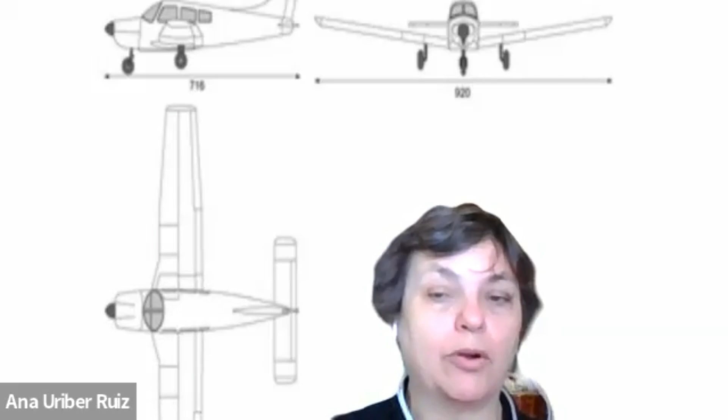And where in California are you? I'm in San Francisco. San Francisco is an unusual place to learn to fly because this airspace is extremely busy - you have San Francisco on one side, Oakland, San Jose, and then a bunch of little airports around. So the communication is fast. What you learn here, you can apply it anywhere outside. It's really good as a pilot who's learning to fly - this is the busiest space. I started learning in Los Angeles, so I can relate.

Yes, we're no longer in Los Angeles. We're in Florida now because we live on this sailboat. It's amazingly similar to flying, except instead of the cruise speed being 120 knots, it's 5 or 6. That's not the scary part - you can't outrun weather. That's the only problem.

So how old were you when you finally decided, I'm going to start flying, and how did you approach that? At the end of my 40s. I have a great teacher at home, so he was always supportive of the craziness of me flying. And then I walked into the flying club one day, and the majority are men - just men. I decided to look into something related with women.

By an unusual chance, I found Women of Aviation, because you have two institutions in the US. One is Women in Aviation International - that's a huge thing, besides the 99s - and then Women of Aviation Worldwide. I met the mind behind the idea, Mireille Goyer. She's a Canadian who does these things a little bit different.

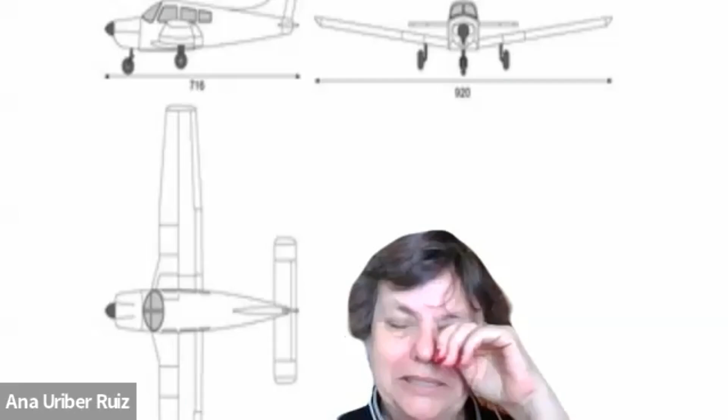Was there something in particular that made it click for you on how to land in those situations? Yeah, it's a challenge. Different planes have a different view. I started learning in a Cessna, which is very practical because you have two doors, you can come in and out. But I felt too low and was not able to see outside, so that wasn't really something I wanted. I do think personally a low wing plane is a little more stable, so I feel more stable in the air and can see outside and what's happening up there.

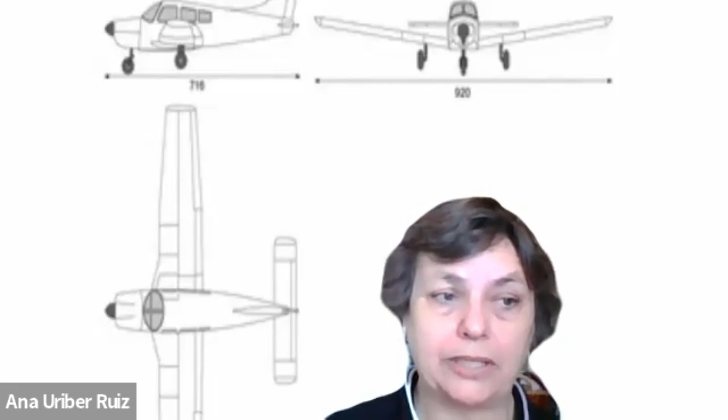That's one of the things that when you read an accident report and the reason why it happens, it's sad - sometimes it's the pilot thinking 'I have to get there,' but having to get there doesn't necessarily mean it's the right thing to do. The weather changes, it's too windy, you cannot see the airport well. You need to have those options unless it's safe for you and the people with you, and you need to park your plane when you have to. So when it's too windy, why fly? You'll be uncomfortable, it's going to be difficult - then no, stay home.

When did buying an airplane of your own come into the picture, and how has the experience of buying the plane and of airplane ownership been for you?

Two pilots at home renting two planes makes it extremely expensive. So aviation, no matter how you want to see it, is an expensive venture - it's not cheap. You have schools that will charge you $85,000 to become a private pilot. I always tell the young generation starting out: look at your numbers and make a plan, because no matter how you want to see it, it takes money. You can become a pilot with $12,000 or with $25,000. You don't know how long it's going to take you, it's in your own time. You have a minimum, but the maximum can go all over.

For some people it comes more naturally than others. For bilinguals like us, the communication is really fast - you need to learn to communicate quickly and answer when someone calls you. I think that's one of the reasons it gets difficult for many people. It's not the flying, it's figuring out what to fly while people are talking to you on the radio at the same time. Those little things are the most difficult combination.

So we sat down, my husband and I, and realized that the best way for the two of us to be flying is to get one plane. It's cheaper for us, cheaper to have the adventure we want to have. And then we'll see if my son wants to join in.

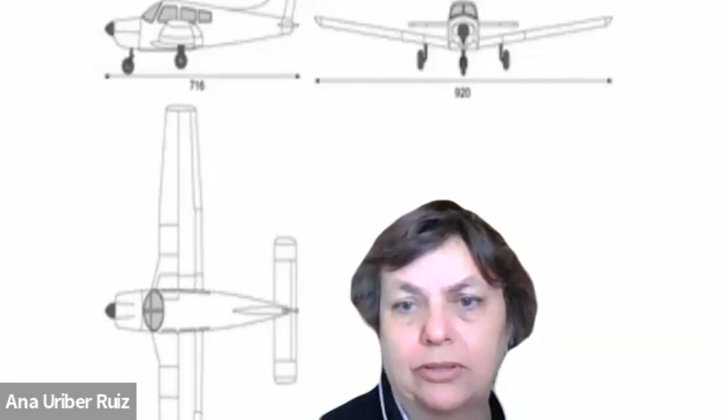But you need to know what type of plane you're looking for. Make sure you have the correct mechanic to check the plane, check the logs, make sure that everything is up to date because it's really expensive. You want to make sure you're getting something you can afford to maintain. One difference between a boat and an airplane is that the regulations are a lot stricter when it comes to aviation, and I think for obvious reasons.

What made you choose the Piper Archer, your specific airplane? Low wings—you like the low wings. I feel very comfortable in a low wing plane. Stable, you're very stable, super stable.

I've flown both. I personally find the Cessna easier to land, maybe because I have a lot more hours on it. I've flown a Grumman trainer, a Piper Cherokee, a Piper Archer, a Mooney, but mostly 172s, 152s, 150s. I find the Pipers more nose heavy, but it might just be that I have so many more hours in a 172 than in the others.

So when you land a 172, the nose gets a little heavy because you go a little slower than the Piper. In the Piper, you can go in at 75 knots, but when you turn final, they come down and down. In a Cessna, when you come around, it's like 65. For me, 65 feels uncomfortable—I feel the nose is really heavy. But it's just one of those things, as you say, it's the way you feel comfortable.

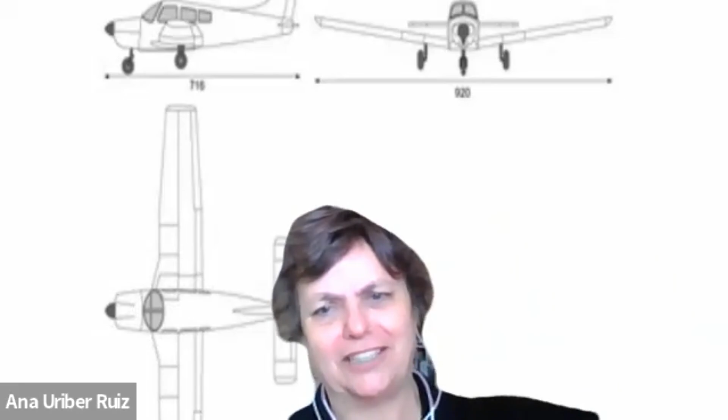They route you out. You need to go to 9,000 feet, then go down here, then down here. It takes hours if you do that—instead of 2 hours, they give you almost 3, because they turn you around. So you learn how they manage the airspace, and you follow up and do things a little different.

It's different every place you fly. The rules stay the same, but it's a busy airspace. Same thing if I try to go into Chicago—who's going to go near O'Hare? You're around O'Hare, it's the same thing: they put you on the side and you stay there because it's not your airspace. It's too heavy, too fast, too quick, too many planes, too many runways—I think O'Hare has 8, or 6 or 7 runways.

It's great if you're not comfortable to get an instructor and start expanding your comfort level with new things, but you want to challenge yourself just the right amount so that you're growing, but not in over your head. Exactly.

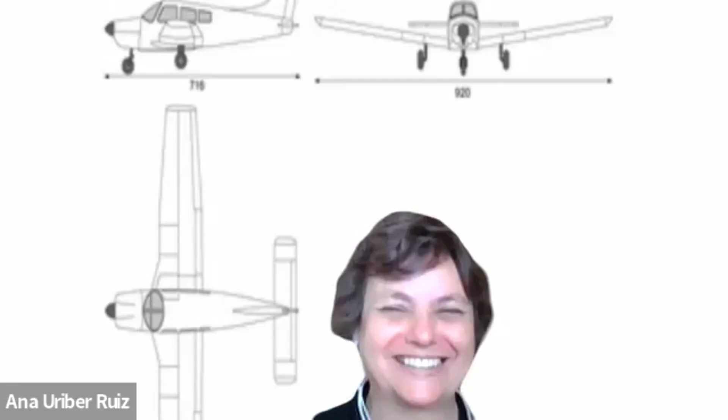Because there's still a risk when you're flying. Just like when you're driving or when you're boating, you want to be aware of the risks and manage them properly. Who was your flight instructor?

Oh, an Argentine. He is amazing. I think one of the things I always tell young women when they start is fly with a couple of CFIs. You need to understand the way they teach, it's good for you to understand what they are teaching you. If their style of teaching is not something you like, you can change. It's okay to change.

But I was very impressed because he taught my husband. He's now on the airlines, but he has always been a teacher. He knows how to pass along that information on the spot, meaning you're applying, he says, remember this that you read? This is what you're going to be doing. So match the practice with whatever was on writing. It was really, really good.

I always talk about how important the chemistry with the instructor is, and the impact it has on how long your flight training ends up taking and how much it ends up costing you has a lot to do with the level of comfort and chemistry you have with your instructor. You have to have it. It doesn't work that you can be there for years. It has happened. I have a friend who did have that happen to her. It took almost 3 years in between instructors, but she finally found the right one and got her license.

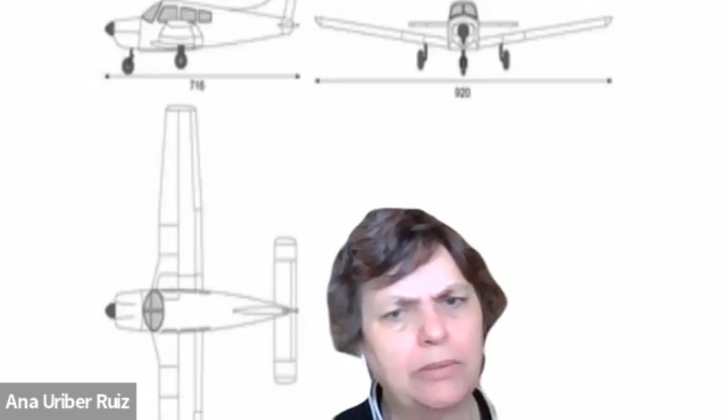So we just tried to go back, and the next weekend we went to Pennsylvania someplace and had lunch there. It was beautiful. When it's too hot, that makes no sense, plus the density altitude and the impact it has on the performance of the airplane, of course. Yes, a lot of people don't realize how much of an impact the humidity and the heat have on the performance of the airplane, as well as the elevation, of course.

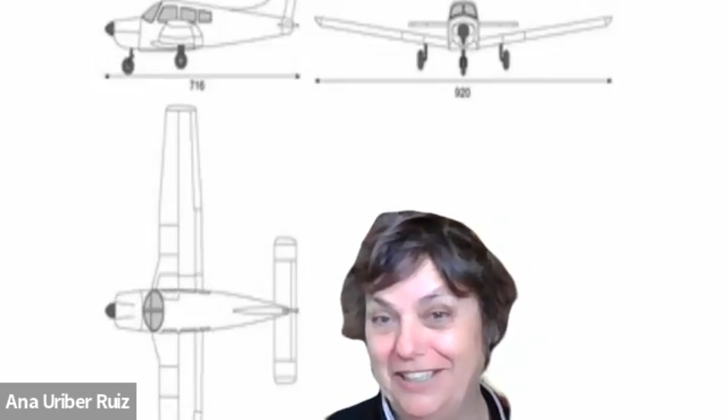That's what happens here all the time. So you fly to Lake Tahoe at 7 o'clock in the morning, but by the time it's 11:30, 12, even though you're sitting at 7,000 feet, it feels like 11,000, not 7.

Try to get out early when it's hot, but you can't do it when you're in the middle of the mountains. You need to wait until the next morning. There are people who don't realize the importance of waiting and have really gotten themselves into trouble out there. You can't fly through the lake - first it sucks you in, and then if you're on the side of the lake, it lifts you up. You still need to go around and around till you go up, then try to go over the mountain tomorrow. It's definitely important to know when to fly and when to wait.

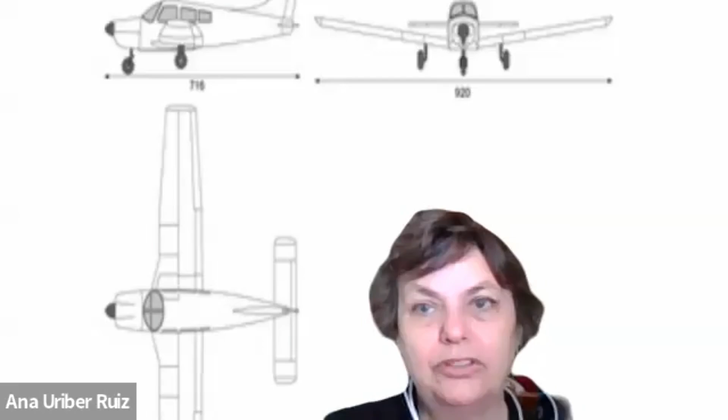That's the good thing about the little airplane. You go in the morning, you check the weather, and you check it not only when you leave, but at what time you expect to come back. If you see the winds are coming and shifting, going up to 35 knots - no, can't do that. I know it's beautiful outside, but you don't know if in 2 hours it's going to be bad. You always check that. It's something we always do.

Nowadays you have the iPad, you have the GPS, and the iPad comes with the weather. You have technology, use it wisely. That doesn't mean it's the only thing you need to check on - you have access to the computer before you leave, and you always have a number in the air that you can call. This is changing, what do I know? You have access, but those things you need to learn along the way and keep handy in case of an emergency.

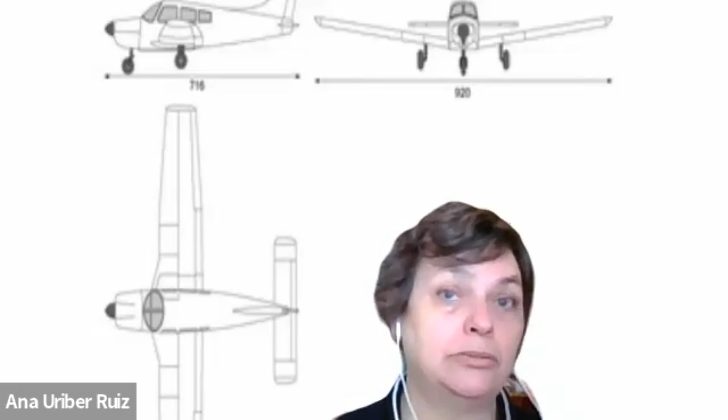That's what I think private pilots need to maintain. It's not the same thing as an airline. It's windy, you just get out. If it's raining, you get out. You don't do that with a little one.

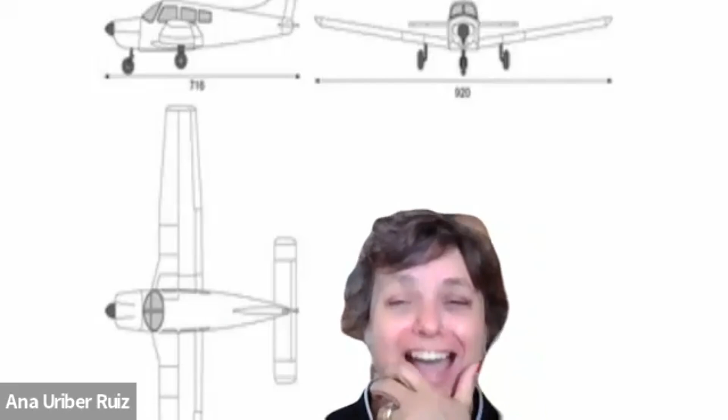What goals do you have for yourself in aviation, or what do you think would be cool to learn next? I know you said you want to work on your instrument rating. I would love to fly with my husband for a week from here to here. The problem is it's not so simple to find somebody who can stay with my son. So our last vacation was 24 hours, because that's about it. We're going to try to plan something maybe in the next 2 years with my sister-in-law, so we'll see. But that would be fun, to go across the big US with my husband. I want to go to Canada and go all the way to Alaska - that's my dream.

Oh, that sounds amazing. It's gonna be during the summer only, right? Because you can't do that unless you're a bush pilot. But that would be fun - sounds like a great thing to put on a bucket list for sure.

One of these days. Do you have GPS in your Piper? Yeah, you have the iPad, you have ForeFlight. It's connected to our GPS, but it's still a secondary help - it's not something you use to fly.

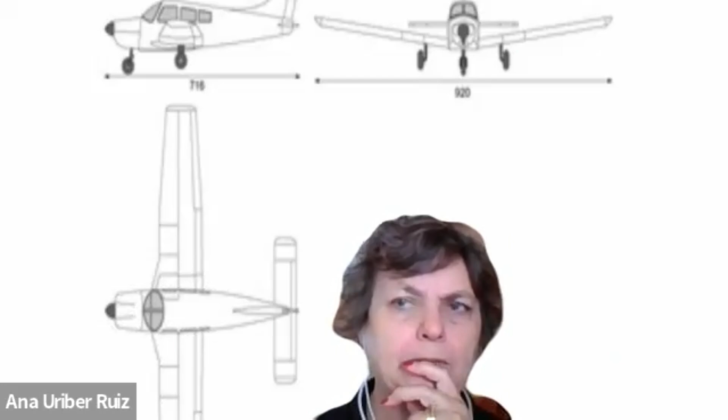That's what I see in this new generation. For me, it's a conversation the CFI needs to have with them - that they need to learn with the instruments they have and add more after they have the private pilot license. That makes things easier to fly, because if you mix them both, one is different from the other. What happens if the iPad dies in the middle of the flight and you don't know how to react with everything you have on? Learn what you have first, then add extra after.

That's cool, because they all try to say, I have ForeFlight. Yeah, but if you don't have an iPad, and the iPad dies, and you don't have a battery in the plane, how do you fly? You're lost in the middle of nowhere. You need to understand where you're sitting when you fly. The old CFIs will always say you fly with a six-pack first. But this new generation is all about having information right in their hands, so they need to learn that the phone, the ForeFlight, everything you have is secondary - it's an aid you can have later. Follow your instruments, look outside - this is key. I agree, redundancy is very important. Have those flights that are long, like a couple of hours.

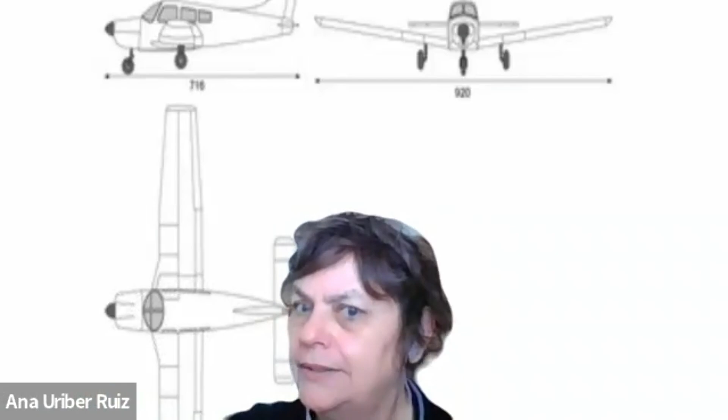For someone who might be interested in getting their private pilot certificate to use in their life and to have that skill, what would be some advice that you would have for them?

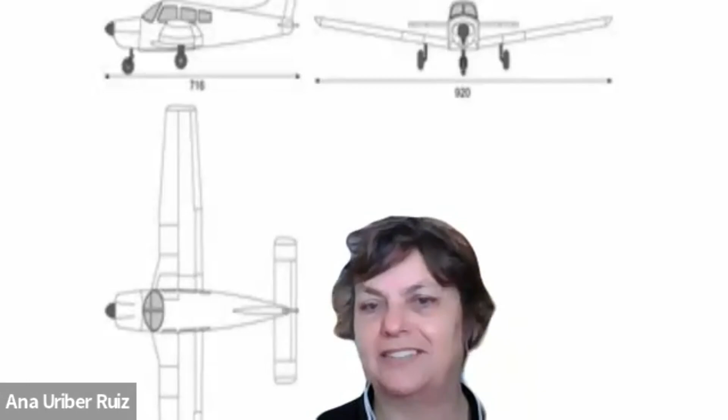Get an introductory flight first. See how you feel flying, right? You're going to be flying with a CFI, an instructor, next to you. But it's about how you feel in a small plane while flying - it's not the same thing as a big one, right? So they need to understand that. And then, yeah, I want to be in the air - and then you realize this is not for me, I feel uncomfortable, I feel unsafe. So don't jump the gun until you have that introductory flight. See how you feel up there. And maybe if you're on the fence, try a second one with someone different in the cockpit.

And then that's it - now sit down and plan. Because part of the issue I see is, I want to start and then don't have the money after. So you've been flying for 25 hours and then you have nothing else.

Latinas in Aviation, the idea was to have a magazine. So the first two magazines that we put out, there was a page in there that I put together that says, where you find people talk about Part 135, Part 61, Part 141 - what is it? So you explain to them what is the difference between one and the other. But the price between one and the other, you're talking about a little car here and a Mercedes there, right? Because that's the difference in the price.

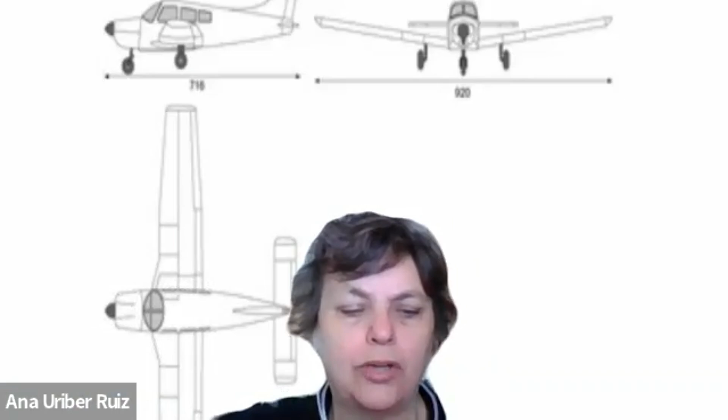You need to see what is good for you - is it okay to go slow at your own pace through a CFI and a small flying club, or do you know you want something cramped, fast, and strong that you're able to follow, right? Because Part 141 has a timeline. Under FAA regulation, you need to go to this place, finish in this place. But remember, the price difference between this one and this one is huge.

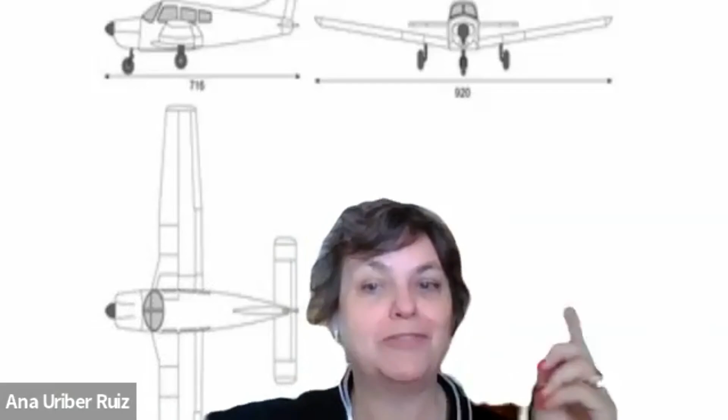So plan ahead. And then they say, I'm accepted into Embry-Riddle, I have a full scholarship for Embry-Riddle. You have a scholarship - the flying plan is not included. So what do you mean? You want to be a pilot with Embry-Riddle? You need to pay out of your pocket, and Embry-Riddle will charge you $85,000 more. Find a place, understand the cost, and see what you can find.

And then you have a lot of scholarships out there - look for them. Be part of the associations - Women in Aviation International, the 99s, the local chapters around, the EAA. You have a lot of associations around, look into them, they always have something. But they have a small scholarship. Yes, but if I have a scholarship for $1,000 here, $300 here, $5,000 here, and $25,000 here, everything adds up - look around, apply for all of them. Why not? The only thing they can tell you is no, thank you.

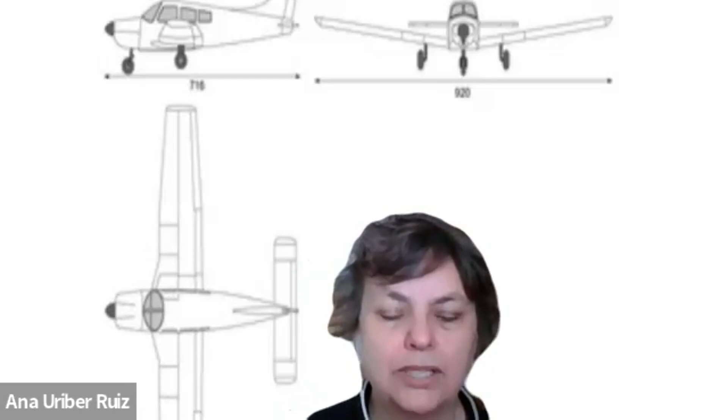So that you learn from that - maybe the presentation in my letter to get the scholarship was not right. So you gotta understand what you're planning. Put it in writing: I want to be a pilot because, from here to here. And that is what they need to see. You don't need to tell them, I come from a little family - no, they don't want to see that. It's what is your end goal and how do you want to get there.

And at the end, you can say, by the way, I was born here and I have cousins, and plan A to B - what do you want, how do you want to get there? That's what they want to see, that's the writing that you need. And women, sometimes they don't want to ask for help, and that's part of the issue.

There's some places and cultural things inside—this is something I need to ask him, whoever that is: dad, mom, brother. Make sure you can do these things by yourself. You're not going to fly with him or her in there. It's you who's flying. That decision is yours, not theirs.

So try to figure out that challenging change in the idea that's part of the culture that says, no, I can't do this. And then you find places where you have a lot of women doing really amazing things, and people don't realize that existed until you start telling them, have you seen this? Have you seen that?

We are very few. They're still battling the field because the number of pilots, at least airline transport pilots, is very low. The difference from 4.1 to 4.3 percent in 4 years is too little. It's very little. But the guard is changing. We need to push them.

I think the change we need has to come from the inside out. The human resources inside Alaska Airlines tomorrow shouldn't be about having a man or a woman, but a person who can embrace something different and elevate you to be more. So when you have that in the HR department, things change—they really change, from the little company to the big company. It's just a matter of having the right fit.

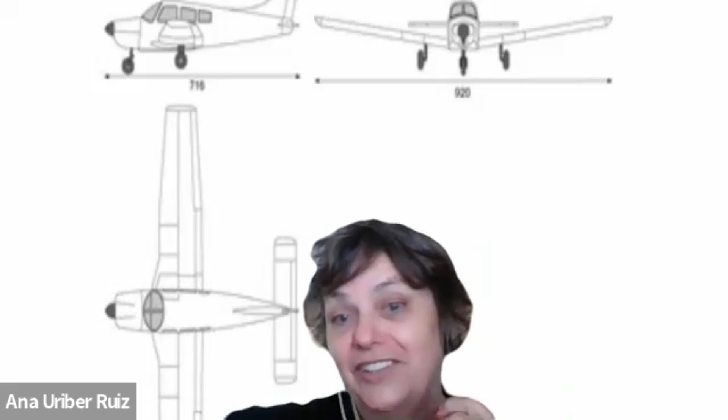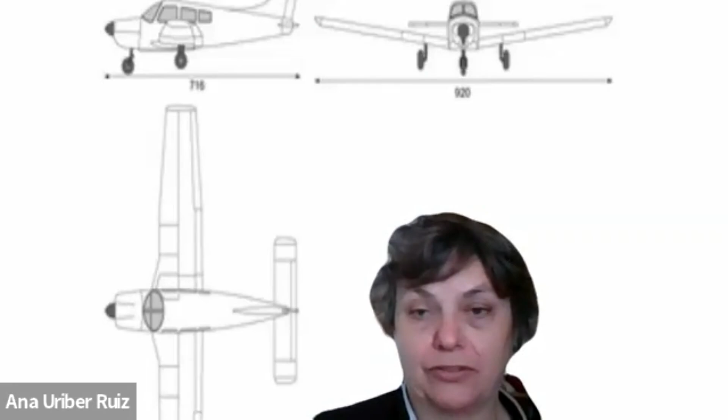It takes time, but you also need to give them the good stories, because there are many. I think it's important to talk about those amazing stories and share them with other women. Because what I've also seen is that a woman who's sitting as a captain at an airline, a captain in United or American or any airline, sometimes gets frustrated with a young woman who's coming in as a first officer.

They need to understand—we have a saying where I come from: the cow needs to remember when it was a calf. Remember the day you were sitting there and the position was the other way around. In this case, you are the captain now. Give them a hand, elevate them, give them what they need, and make them feel strong enough to use their voice.

Help them out tomorrow. Make sure that whatever experience you have, you say, remember, don't take this, don't take that, don't do that, be sharp, be prepared. Those pieces of advice from a woman to another woman sitting in the same place are key.

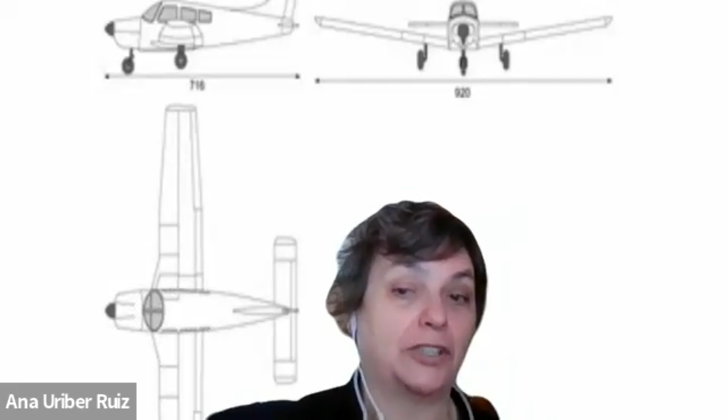But sometimes you have it the other way around—she says, I'm the captain, it took me 6,000 hours to get here, you only have 2,500 and you're sitting here already. So that attitude also needs to change a little bit, right?

So you have men who will give you the right advice, and men who will try to put you down. And you have women who will give you the right advice, and sadly, also women who can put you down. So it works both ways.

So sometimes when they're already up there, have that conversation, because it's really important that they be at ease with you coming in. But when you see that attitude, say, hey, wait, remember when you were here? Let's talk about it, because that's what you need to use your voice for. So if another human being is sitting with you, make sure you do it right.

Was there something about your relationship with yourself that changed when you finally got to see yourself as someone who was capable—like, I did this, I'm learning to fly, I'm actually doing this, I got my certificate? Was there a moment where your relationship with yourself changed through the act of learning to fly?

Nice question. We feel a very strong sense of accomplishment, because you alone are the one who's flying. You don't need somebody else to fly with you. You can pick up that key, get in, and fly. There's a responsibility you have when you become a pilot, the responsibility when you go inside that cockpit and fly.

The responsibility that you were lucky enough to be sitting there, but at the same time, maybe embrace the one who's coming and help them out, because they're going to go through the same thing too—maybe a little different, maybe a little shorter, maybe longer. I think you need to be open minded to the people around you. It changes you because you become more independent. You understand the privilege you're in—it's a privilege to be in the air.

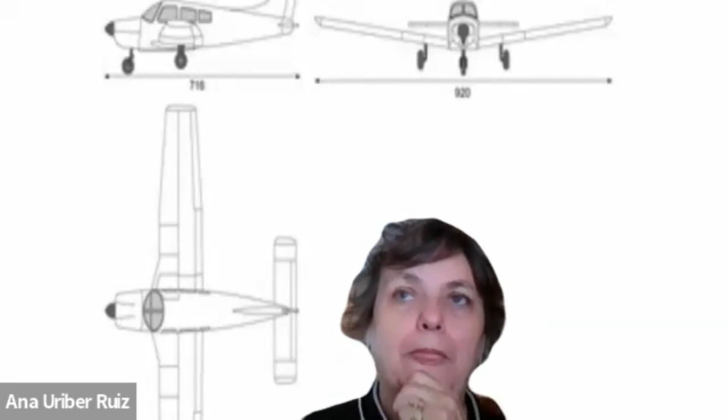It's not like learning to drive a car. It's a huge accomplishment, but it also is a privilege to be there.

When I was a singer and a DJ, I always used to say, nobody's going to die if I hit the wrong note. But I was very aware when I started flying that I lost the right to say that, because people's lives are on the line in the airplane and on the ground. It's a responsibility, it's a big thing, but also to get to know yourself as a person who's capable of taking on that responsibility and making those decisions.

It can be a really special and transformative thing when you realize that you are capable of learning to fly that machine, of making good decisions - aeronautical decision making - and to carry that responsibility with pride and with the appropriate amount of respect for it.

Is there any last advice or thoughts that you would want to leave the listeners of the podcast with today?

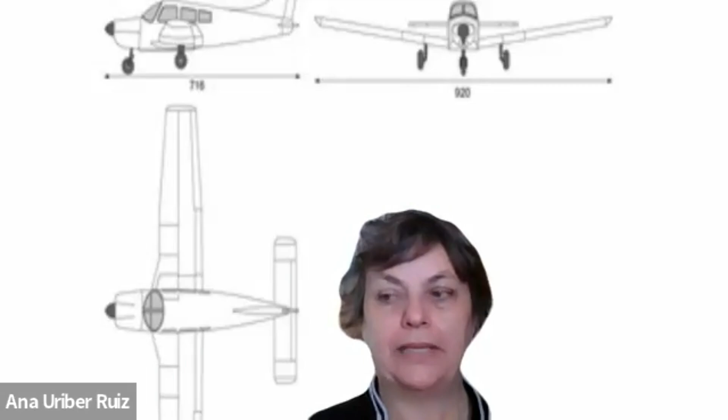Latinas, we are very few up there. Reach out, because we have a lot of things for the Latinas. I think they need to learn that you have another sister, and that sister will tell you, yes, you need to do this, and yes, you need to do that.

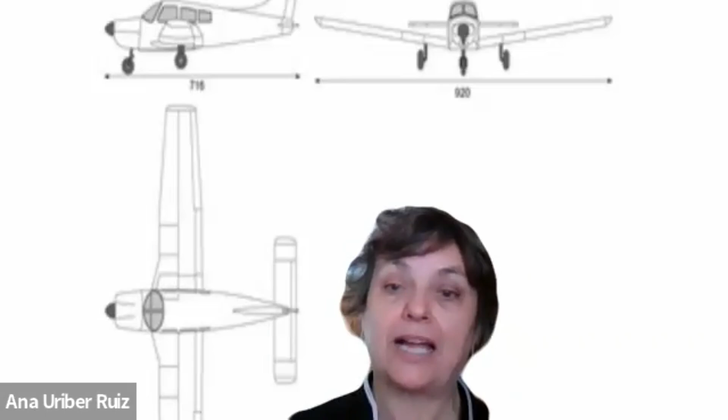Reach out when you have a question - as a woman to another woman who wants to fly, reach out. Look for that mentor, for that person you can talk to. We can guide you not only on the financial side, because we know what it is, but also through that learning period that you have when you start picking up those books, when you start flying at the beginning, when you get upset with something.

Communication is usually one of those issues. But reach out - don't be afraid to reach out to another one who is in the same position as you.

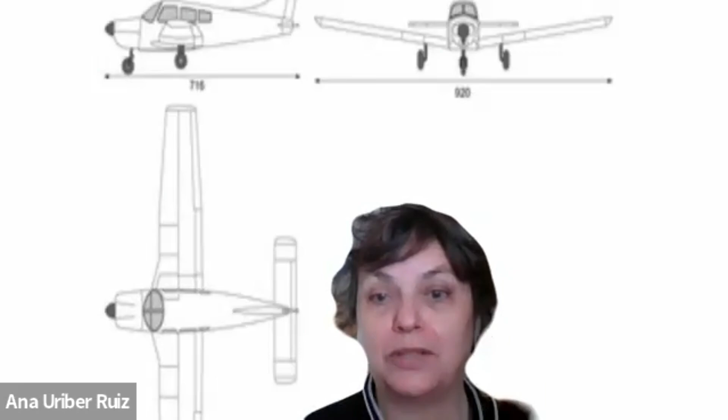I used to have a young lady who had a get-together once in a while with student pilots - bring the student in, ask why do you think about this and why do you think about that, and where do you find the answer for this. So try to do the same thing, and bring a pilot within that group, because it will tell you what you're looking for.

So reach out, I think that it's really important to reach out. 'I have a question, can I go talk to you?' That's very important - the aviation world is very small.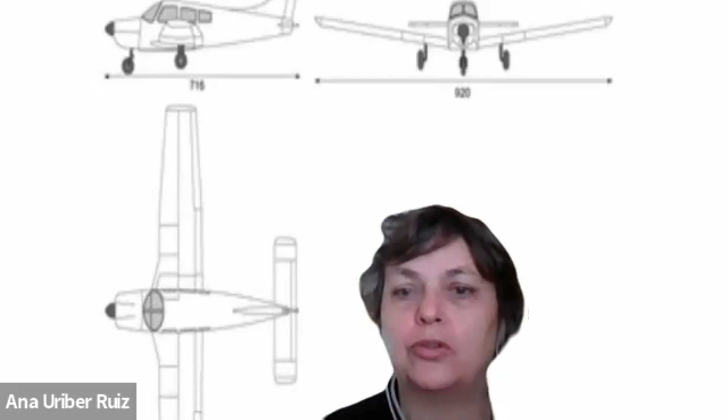The aviation world is extremely small. A lot of pilots are in the US, but you go out of the borders and the amount of pilots is very small - they know each other, they know who you are, they know where they're going. I have been fortunate to see women in Costa Rica, because my husband is Costa Rican. Reaching out is nice, to see them be able to do something that is not out there.

You have a young lady who's in her 30s who was hired directly as a captain - hired from one airline to another one directly as a captain. Embrace that, celebrate her every time you can. So look around your neighborhood, in your area where you are, look for another woman, talk to them, and feel comfortable enough to ask all the questions you have.

Thank you, that's fantastic advice. Because, like you said, women and Latina women often feel very uncomfortable asking for help. But there is a community that is cheering you on and that wants to welcome you to the world of aviation. Find those people and reach out to them. Thank you for that, and thank you for sharing your story.